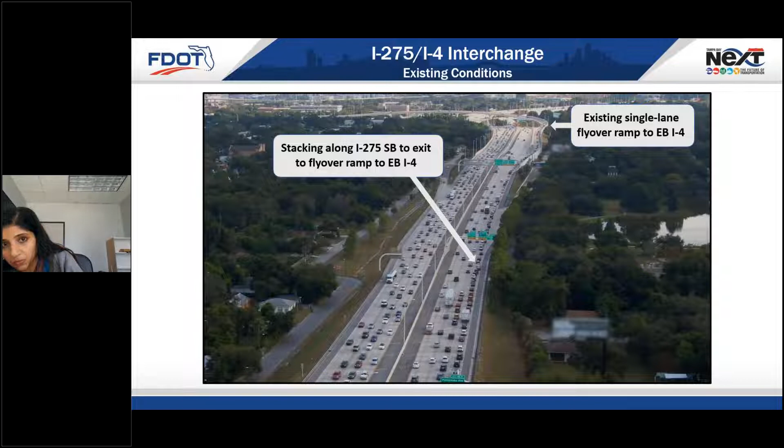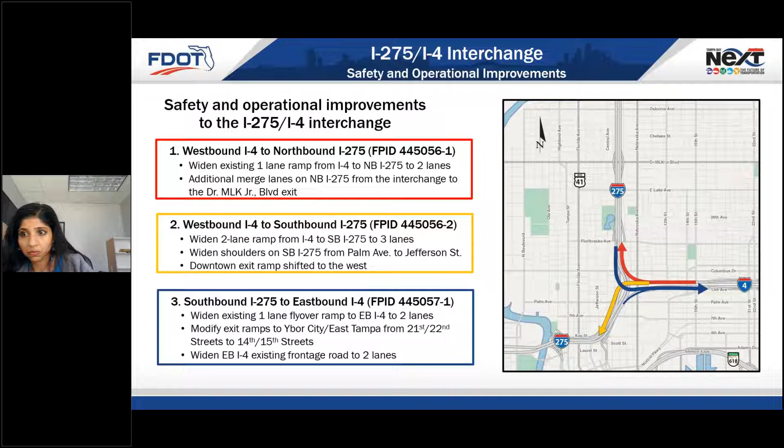These quick fix safety and operations adjustments will reduce the previously stated lane weaving and speeding, the congestion and lining up at the I-4 exit, and improve access to the local exits.

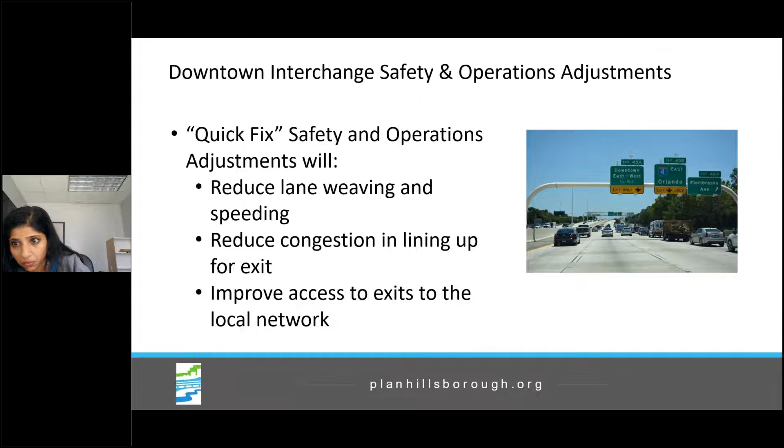FDOT is measuring that the downtown interchange will reduce deaths and serious injuries on I-275 near I-4 by nearly half. This means that the downtown interchange can prevent 1 to 2 fatal crashes and roughly 220 injury crashes annually. Since there are roughly 200 fatal crashes in Hillsborough County annually, this can mean a 1% drop in that measure. FDOT is also measuring a 14% traffic reduction on local streets.

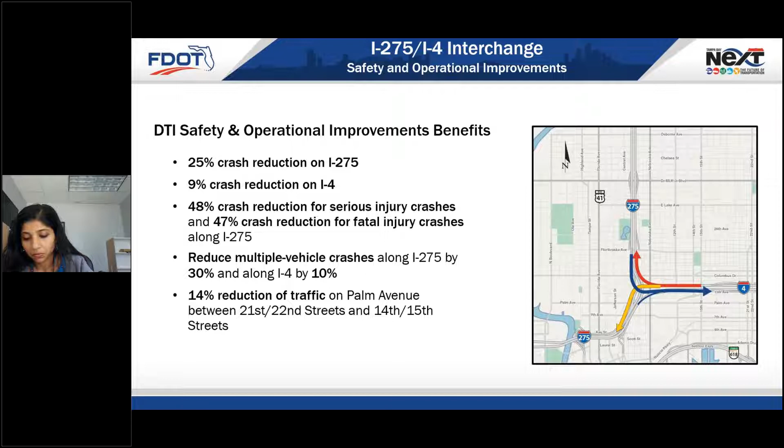So continuing on that topic of local streets, the downtown interchange is also planned to improve connectivity and safety on the local street network below. There is a proposed trail system that will connect the Tampa Heights Greenway project to Ybor and Encore development.

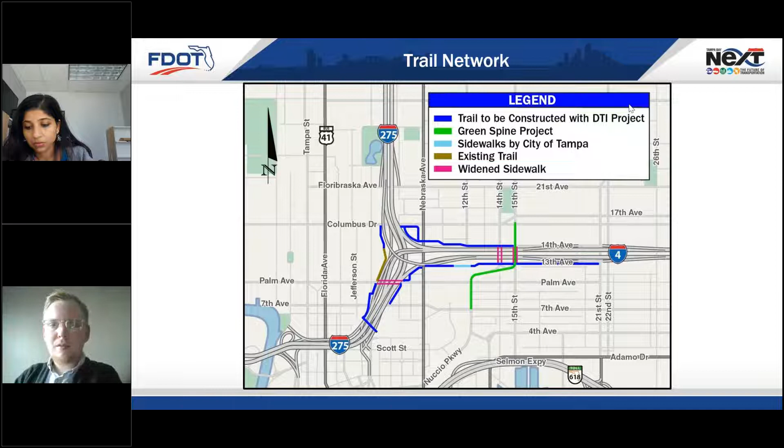Oh, did my screen change? Can you still see me and see the screen? Okay, I see your screen.

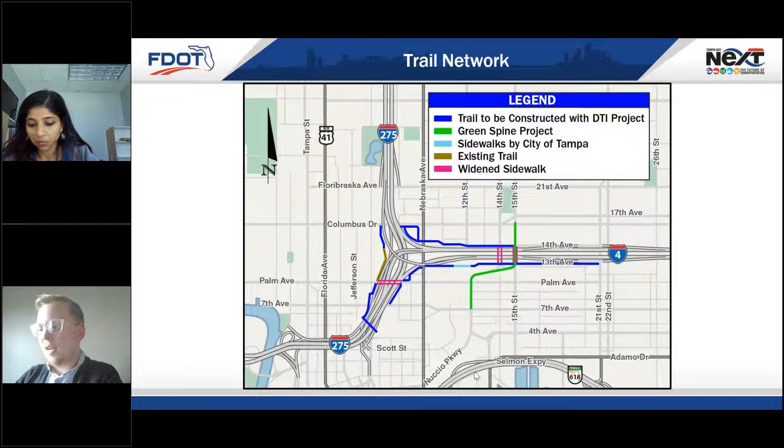Full screen. Okay, perfect. There's a proposed trail system that will connect the Tampa Heights Greenway to the Ybor and Encore development. Further, these improvements will complete streets under the interstate to connect these communities. The TIP amendments are also intended to relieve some issues on the local street network below, like drivers driving too fast on and off the interstate ramps and difficulty in seeing at night. Some mitigation strategies include reduced lane widths and having a high emphasis on crosswalk markings.

This slide shows the typical street sections for 14th and 15th Streets. While FDOT is responsible for the work on 14th Street, the City of Tampa has plans to improve 15th Street through the Green Spine project. These changes include sidewalks moving from 5 to 6 feet and lanes being narrowed.

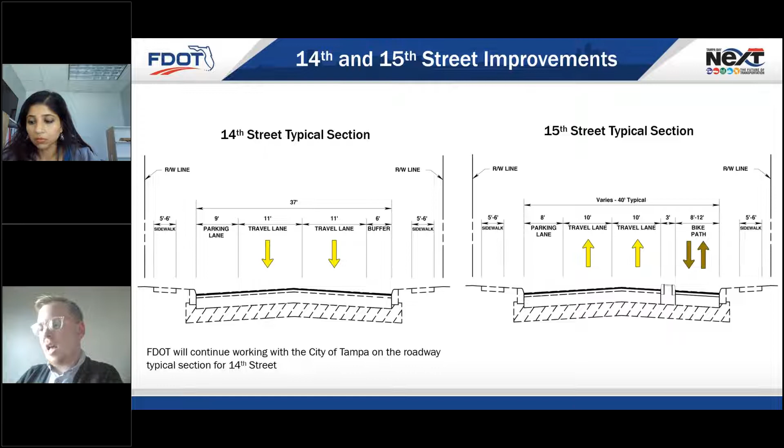The first amendment in this set is amended from right-of-way acquisition to right-of-way and utilities, preliminary engineering, environmental care, and design build for a total of $26 million. This section is westbound I-4 to northbound I-275. The next amendment is an addition of $60 million for westbound I-4 to southbound I-275. And the third amendment is the downtown interchange project adding $66 million for the I-275 southbound off-ramp to I-4. These 3 amendments make up roughly $154 million.

So the next group of amendments is the Westshore interchange reconstruction preliminary phase. These 5 projects are preliminary projects that make up 1 out of 4 phases of the Westshore interchange. The interchange has been a top regional priority for many years, and the changes are intended to reduce congestion and weaving at the intersection of State Road 60 and I-275. They will also complement the Howard Frankland Bridge reconstruction.

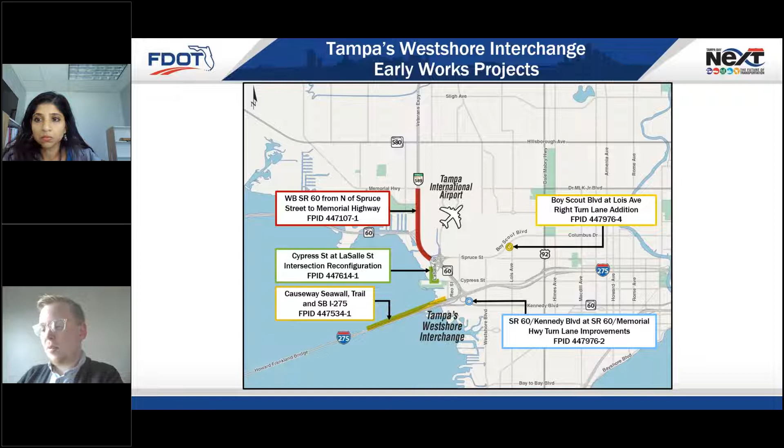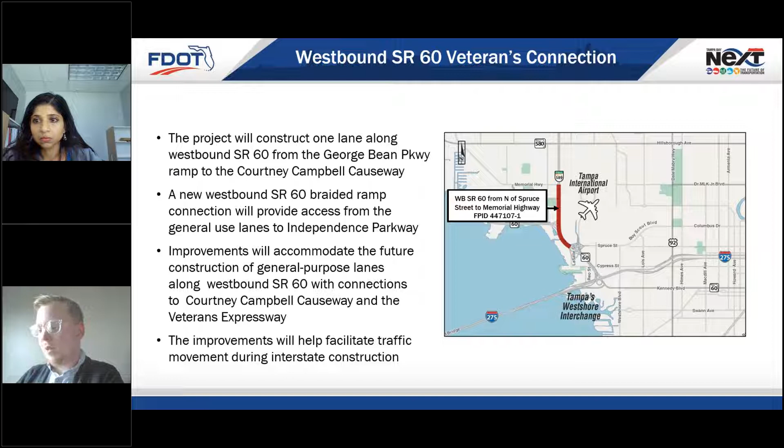The first project, westbound State Road 60, will construct 1 general purpose, not a toll lane, along westbound State Road 60 from the George Bean Parkway to Courtney Campbell Causeway. This project has a total of around $36 million for utilities, preliminary engineering, environmental care, and the design build. The next project will extend a new seawall and construct an adjacent shared use path along the north side of the I-275 causeway. This project has a total of around $37 million.

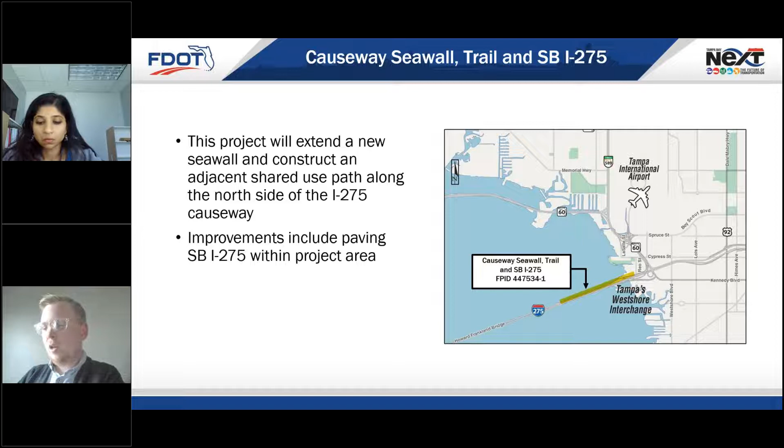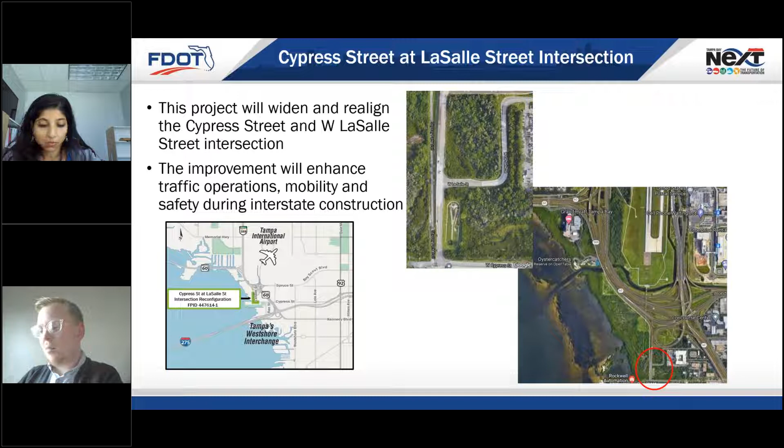The next project is Cypress at LaSalle Street. These two low-volume roads are near business parks. They'll be widened to enhance connectivity to two off-ramps and one on-ramp to the Westshore Interchange. The project cost is an estimated $3.6 million.

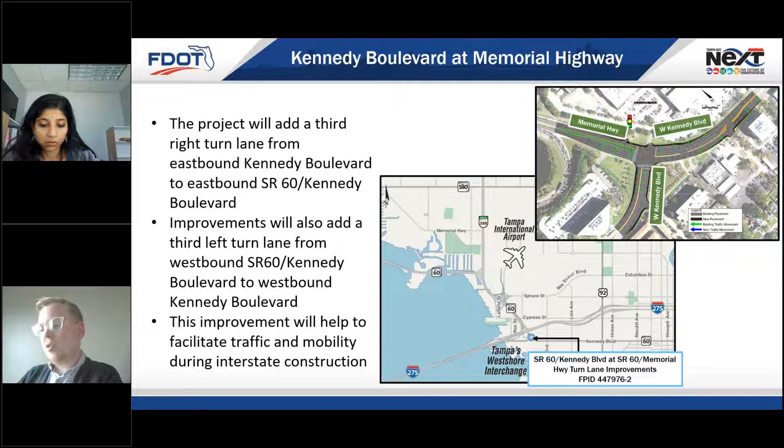Amendment 13 is West Kennedy Boulevard at Memorial Highway. It will allow the construction of additional left and right turn lanes, one from eastbound Kennedy to eastbound Kennedy, the other from westbound Kennedy to westbound Kennedy. FDOT believes these will also facilitate traffic and mobility during future interstate construction, and the project has a total of nearly $2 million.

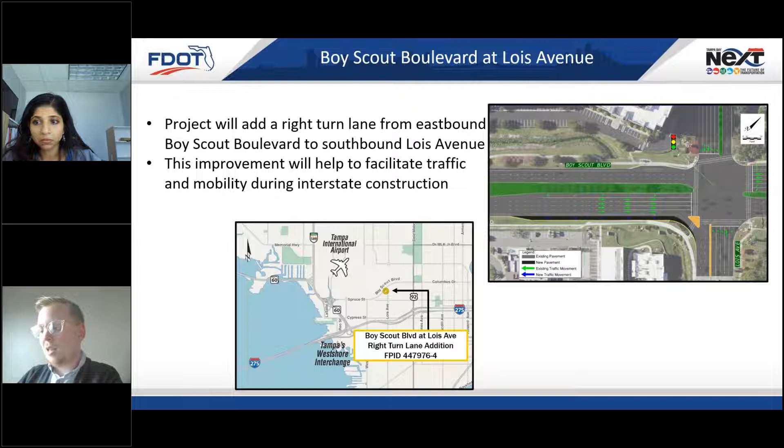The final Westshore Interchange amendment is a project to add a right turn lane from eastbound Boy Scout Boulevard to southbound Lois Avenue. This project has a cost of around $527,000.

Finally, the Integrated Corridor Management, or the traffic congestion management technology, will allow a traffic control management center to manage congestion among several key corridors. These corridors include Nebraska Avenue, Tampa Street or Florida Avenue, Hillsborough Avenue, Dr. MLK Jr. Boulevard, Boy Scout Boulevard, and Kennedy Boulevard.

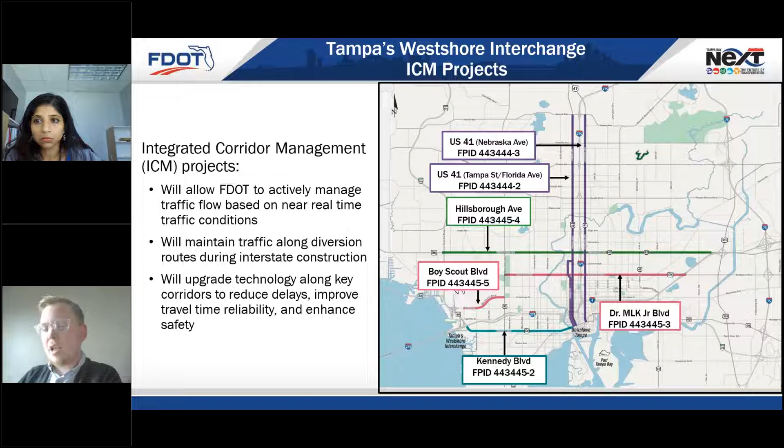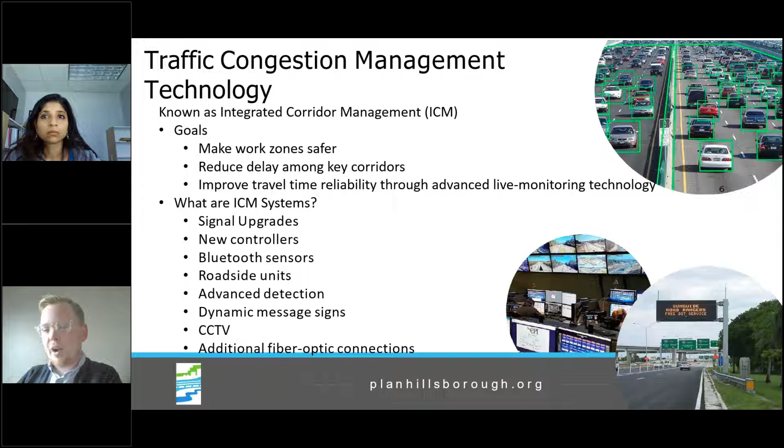These systems include advanced detection monitoring systems, dynamic message signs, and closed circuit television. They have the goal of making work zones safer and improving travel time reliability. Ultimately, they will deploy technology to allow engineers to see what's happening with traffic in real time. And as stated before, Ed Albritton from FDOT will elaborate on these technologies. So the first of these amendments is roughly $5 million for the design and build on Florida Avenue or Tampa Street. The next is roughly $6 million for Nebraska Avenue from Kennedy Boulevard to Bearss Avenue.

Amendment number 17 is $4 million for the design build of ITS systems on Kennedy Boulevard from West Memorial Highway to Ashley Drive. The fourth is Amendment 18 for funding, including $3.8 million of ITS systems on Dr. MLK.

The fifth is for $3.3 million for ITS systems on Hillsborough Avenue. And finally, the sixth ICM project, and amendment number 20, is $1.6 million for ITS systems on Boy Scout Boulevard from Airport Service Road to Dale Mabry Highway.

As part of our public participation pilot, we're aiming to ensure that the public has had the opportunity to voice their concerns and support before they come before the committees and board. One of our outreach projects came from the Long Range Transportation Plan and Outreach Survey that received over 5,200 responses. In this survey, respondents were given 4 options regarding a downtown interchange reconstruction.

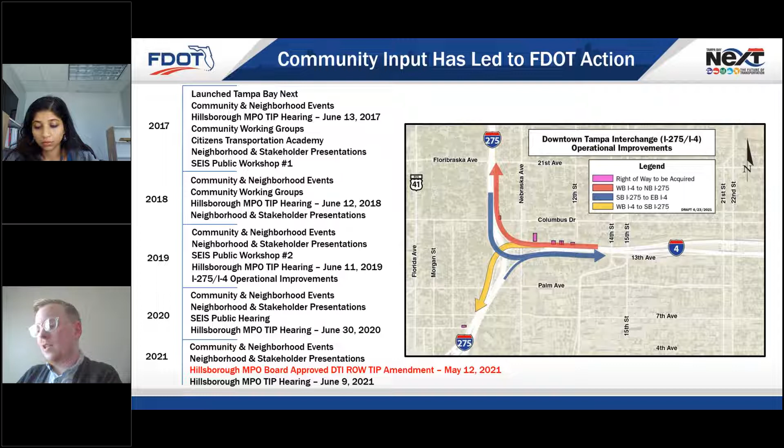While the no-build score was higher in downtown areas and the full rebuild rating was higher in ex-urban areas, the safety and traffic quick fix option had the highest star rating overall and was supported or unopposed by most zip codes. As part of the pilot, we also asked jurisdictions what public outreach they've done. FDOT in this case has done significant outreach regarding the downtown interchange since 2017. This has involved a series of community and neighborhood events, community working groups, and neighborhood and stakeholder presentations.

As part of the pilot outreach, the TPO has also done significant outreach for these projects. This has included a press release to 30 media outlets and over 100 neighborhood associations and community groups. There's also a web page that has been posted. Further, there's been social media outreach that can be seen on the left, and 6 of these signs on the right posted along project corridors.

So the TAC and CAC had some suggestions for us. These include leading pedestrian intervals at intersections with additional turn lanes, accommodating cyclists to Cypress Point Park and Courtney Campbell Causeway, noise walls at Robles Park, landscaping at noise walls, narrow lanes and wider sidewalks on 14th Street in coordination with the City of Tampa, traffic signal prioritization for buses on ICM corridors, to ensure that new fences do not impede the walk and bike access opportunities, and to refer to the downtown interchange as part of the high injury network rather than a Vision Zero corridor.

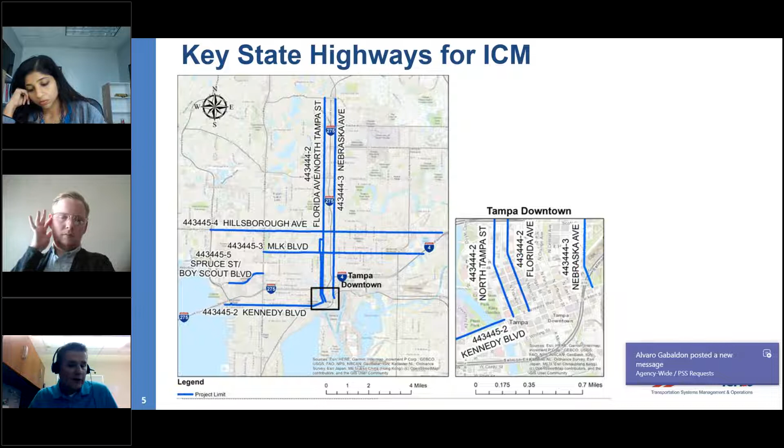We're filling in CCTV camera coverage holes if we have portions of these corridors that we can't see from our traffic management centers, and we want to fill in those gaps. Same thing with these Bluetooth readers, travel time measuring devices. We already have a fair amount of those deployed within the department, so we're just increasing that deployment as well. We're adding blank out signs as a part of this deployment, and right now that's a part of other efforts in the region.

We're doing that as a part of a project, I-4 FRAME, that I'm a part of, but those are more diversion route adherence signs, if you will. There's very little functionality to them. It's basically a right arrow that comes up, or it's not on. It's only active when the diversion route is active.

What we're exploring, if the budget will allow it, is trying to make these almost like small dynamic message signs with a little more functionality. I don't believe they would function 24/7 like a normal interstate dynamic message sign, or even arterial dynamic message sign, but I would like to be able to get a little more functionality at these strategically important intersections.

We also will be upgrading the detection at the important intersections, and upgrading controllers to allow us to get to what they call automated traffic signal performance measures. ATSPM is the mouthful of acronym that you'll hear referred to. Essentially what that means is we're going to deploy a system that will automatically collect and convert high resolution traffic controller data into actionable performance measures. It's going to allow us a look into coordination patterns at a depth that's just not possible with legacy systems. That's about the simplest way I could put that.

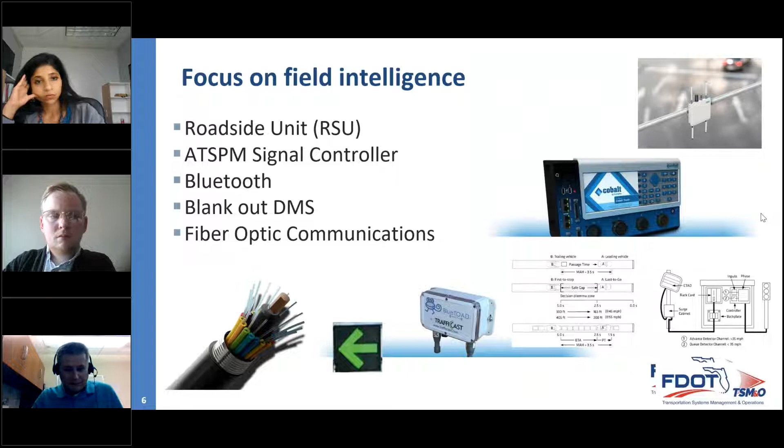The system we want leverages these signals and these facilities to facilitate that trip. It doesn't just tell you which way happens to be the fastest at that moment. It tries to get involved in that trip and optimize it. Next slide.

Some of the other projects, as I mentioned, we're kind of filling in gaps. These are the two big ones that are the biggest connected vehicle deployments for sure, but they're not vastly different from what we're trying with the ICM as well. So I-4 FRAME is already moving along, has been for quite some time now. We're moving up on the final plans for the District 7 portion, and the City of Tampa ATMS has been going for even longer than that. Next slide.

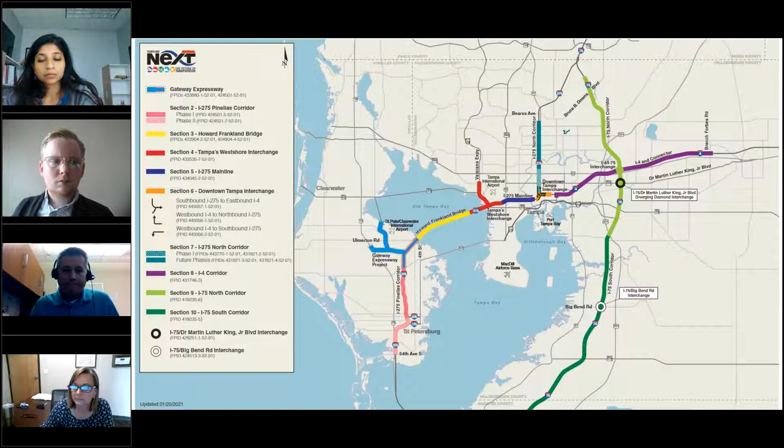Sure, Jeff, go ahead. Yeah, this is for Ed, and I'm just curious on the map. Maybe you can bring it up. The map where you showed the potential alternate routes from the airport to downtown. Is that like hypotheticals, or I'm just curious as to why on certain days of the week different routes would be recommended? That's totally hypothetical. And to point out, not this one, Connor, it's the last map which shows the alternate routes. I just saw it. Anyway, go ahead, Ed. Yeah, this one.

Well, oftentimes, that's not necessarily just a recurring traffic decision. That's often incident driven. And I didn't really create the slide, so I'm kind of trying to read the tea leaves a little bit, but I think that's what they're trying to highlight, that given what's going on any given day, any given community, you might need to deviate from what is typical for you, if travel time is what's most important to you.

Okay, that's what I figured. It was just the days of the week were throwing me off. They were listed there like it was an expectation or something. Okay, thanks. Yes, sir. I had a similar question too, so thanks for clarifying that.

And also for the City of Tampa ATMS project, I had a question. Is FDOT paying for that for the ICM projects? Did we pay for the City of Tampa? Was that what you asked? Uh-huh. I know at least a good portion of the funding was FDOT money. I don't know if it was all. Once again, my day-to-day activities are predominantly on the interstate, so I don't attend those progress meetings for the ATMS. So I'm not, unfortunately, completely plugged into it.

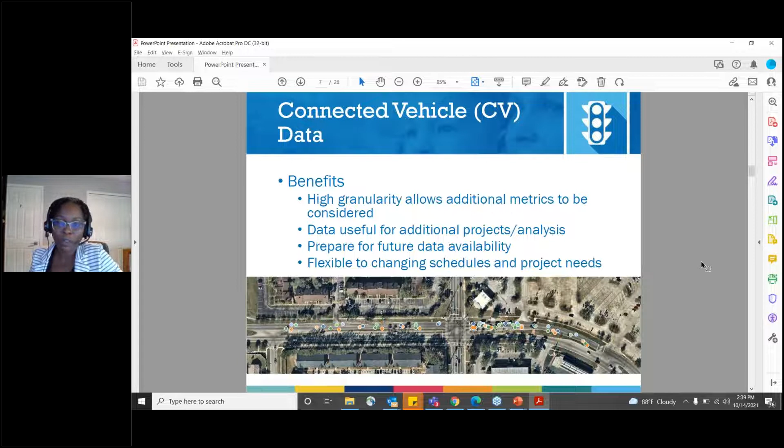So as this diagram shows, there's a really high level of granularity with this data, and you can really see what each vehicle is doing as it travels through the corridor. This has allowed us to look at some additional metrics, which I'll talk about shortly. We also think this data may be useful for some other projects beyond signal retiming evaluation. We're looking at some of those use cases now, and we're also hopeful that starting to work with this data now will help us prepare well for when connected vehicle data becomes more common.

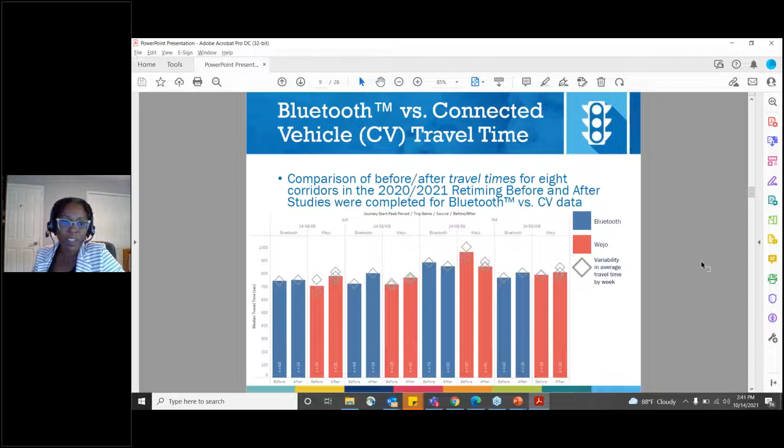From a high level perspective, we found that the travel times calculated by the Bluetooth data versus the Wejo data were within about 30 seconds of each other. And we also found that if the Bluetooth data was showing a reduction in travel times for the corridor, the Wejo data typically also showed a reduction in travel times for the corridor. So we're feeling pretty good about the usability of this Wejo data.

Next slide, please. Next slide, please. Thank you.

So now I'm just going to go through the additional performance measures that we've been able to calculate using this new data source. As I noted earlier, historically, we focus on evaluating the 3 metrics along that top row on the slide: the end-to-end travel time, the segment travel time, and the delay at intersections. And we're still able to calculate all of those metrics using the Wejo data, but due to the increased granularity, we're also able to look at some additional metrics like signal progression, the number of stops and slowdowns, and the travel speed along the corridor.

Each of those metrics has some limitations, but as we look at each of the metrics together, we're able to get a pretty good picture regarding the benefits of a signal retiming project along a corridor. And each of these metrics might also be applicable to different projects depending on what the goal of the retiming is for a particular corridor.

Thank you for going to the next slide.

So the first metric we're going to look at is the number of stops and slowdowns along a corridor. And this particular image shows one individual trip. Along the y-axis, it shows how fast a vehicle is moving, and along the x-axis, it shows how far along in the journey it is from a time perspective. So you can see that this vehicle starts out going about 45 miles an hour. It increases speed a little bit, and then you can see where it dips down to about 15 miles an hour there at about 50 seconds.

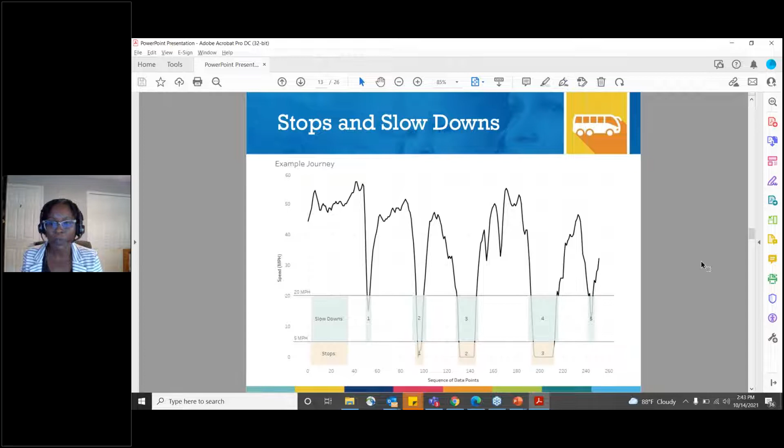And within Wejo, anytime the vehicle slows down under about 20 miles an hour, it's counted as a slowdown. And anytime it slows down under 5 miles an hour, it counts as a stop. So we're able to do this type of analysis for every vehicle along a corridor. And then once that is calculated for each vehicle, we're able to look at some average statistics like how many times along a corridor a vehicle is likely to slow down or stop before and after the retiming.

Next slide. So this data can be really helpful in terms of a before and after comparison because it allows us to see how often, on average, vehicles are likely to hit a green light along a corridor.

Next slide, please. So if you click on the slide, it should have, or is this just a PDF? Okay, this is just a PDF, I think.

Is a link here? Should I? There's a link here. If it'll allow you to hit the, not the link, it should play though if it's in the presentation. But it's okay. It's a PDF, so I don't think it can present itself now.

The data is helpful because it allows us to see approximately what the queue is doing at a specific intersection. And I say approximately because, again, we're only looking at about a 3% sample size of all the trips. And so there may be a tendency to underestimate the queue length. But we're still overall able to get a better idea of how the queue is developing. We just may not be able to make specific queue length calculations from a before and after perspective. Next slide, please. You can move on, yeah, thank you.

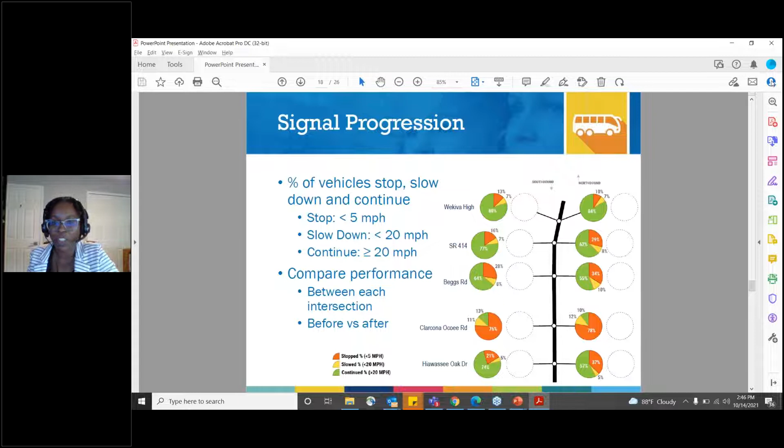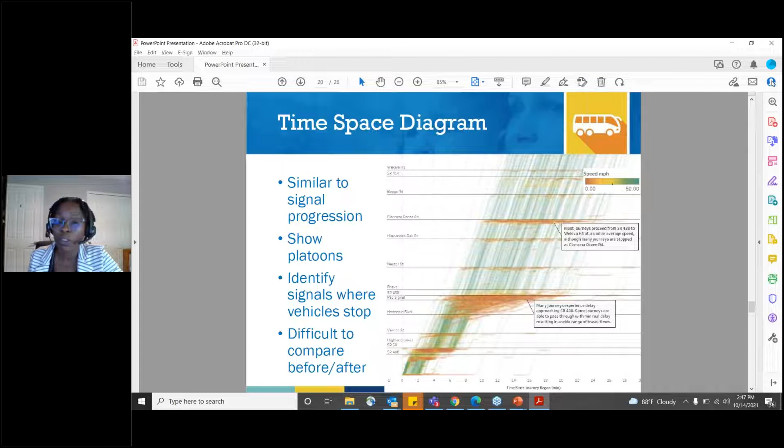And then similar to the previous metric, we can also look at the progression of individual vehicles and create the time-space diagram that is shown here. This diagram has time on the x-axis, and on the y-axis, it shows each of the intersections that the vehicles are proceeding through. You can see in this example that there's a lot of red and horizontal movement at that State Road 436 intersection in the middle of the graphic. So the travel time is getting pretty spread out at that intersection. This type of information can be particularly helpful for our maintaining agencies and for the retiming consultants prior to the retiming analysis to help them with defining the goals for the retiming for a particular corridor.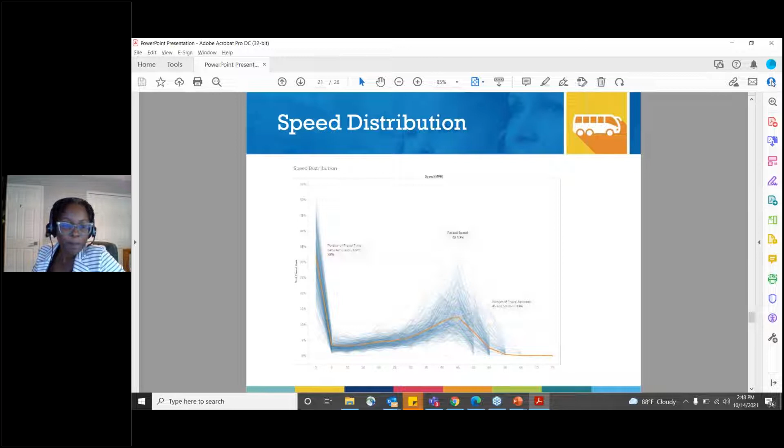And from that speed management perspective, we would want to see that orange line move over to the left a bit in the after condition so that a greater percentage of vehicles are moving at or below the posted speed. Next slide, please. And then next slide. And then the last metric I'm going to talk about is corridor utilization, where we can basically look at the distance that particular trips are moving along a corridor.

And this type of information can be helpful in understanding how signals might be coordinated together, and if there's a particular type of trip that's predominant along a corridor that we want to correct for. This information can also be helpful for our maintaining agencies and retiming consultants to have prior to retiming for developing a new retiming scheme.

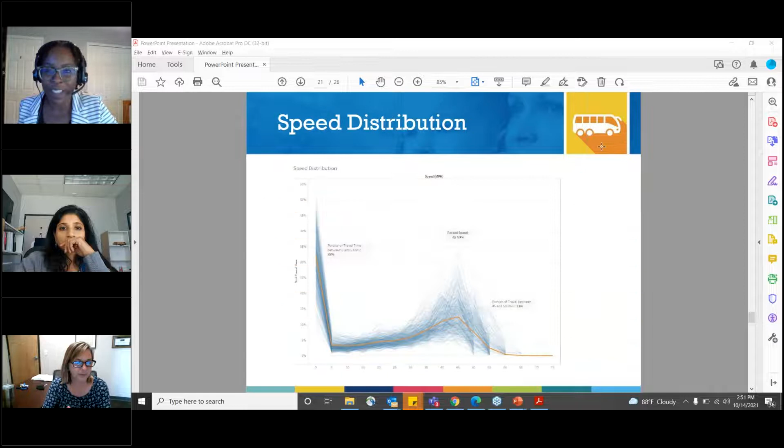I've talked to consultants who do signal timing in our region about programmed stops, how do you control it, and also to use shorter cycle lengths. So I'm trying to figure out where my question is really going. What kind of cycle lengths were they using? Do you have that? It's different for every corridor. For the one in the example, I don't know off the top of my head, but I can find out for you. But it really just depends on the jurisdiction, honestly, what cycle lengths they want to use.

Yeah. Well, it's good to have additional data, and I applaud you for looking at travel time reliability and not just travel time, because travel time, of course, you get rid of all your delay, but it also allows people to speed. Right, exactly. I'm sorry, I had an emergency off to the side for a little bit. Did you have safety information in here too? But this is really just focused on using a different data source and how we can use the WEJO data to evaluate and look at the corridors from a different perspective, right? Yeah, that's really the focus here.

Yeah, having this new data set, we've always been looking at travel time reduction, travel time reliability, and intersection delay. But the granularity of this data has allowed us to look at some different metrics that we're excited about, and try to get some of our maintaining agencies excited about too. Yeah, because there's so much data available within every vehicle. Someone was just saying the other day that we launched the first space shuttle with less technology than what we have in our car today. It's pretty amazing. Thank you for bringing this to us.

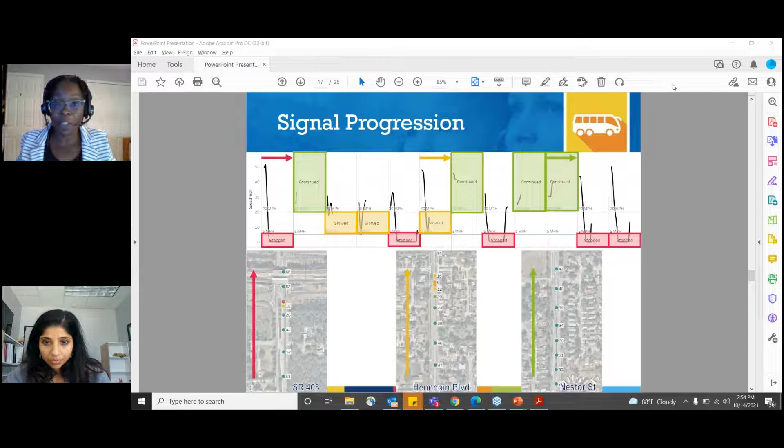And we're sort of working through what we'll do for future years. So if you need, on particular corridors, if you're looking for one type of data, that's all you need, you need to purchase that according to your need and on a corridor basis. Well, we purchased the data for the entire 3-county region for a month at a time, and once we have that data, we can really summarize it.

However, if, let's say, you were within the region and you knew you wanted some specific type of data for a corridor, we could pull that down and then share that with you. We just can't share raw data. Yeah. Gotcha. Okay. So you're able to share the reports for other jurisdictions according to their requirements. Exactly. Gotcha.

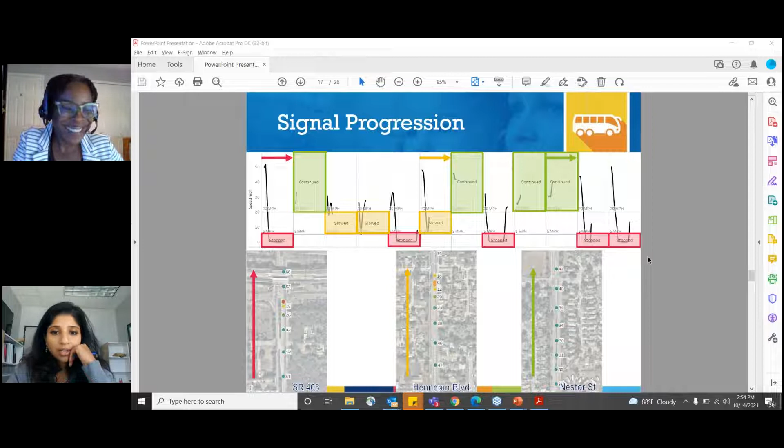Yeah, I'm still digesting it and seeing what other uses we might have with this. It's a lot, and feel free to follow up after, because it is a lot. I know that I just blurted it out. I might need some clarity on the queuing analysis, what you said was and was not helpful.

Well, for the queuing, what we're finding to be helpful for us right now is more just getting almost a qualitative feel for where the queue is ending. Because, like I mentioned previously, we used to set out the Bluetooth devices where we thought the queues would end, and we were finding that cars were queuing far, far beyond where we had our devices.

And so since we were able to see the data with this type of granularity, we can see how far back the queue goes. And Kittelson's working now on working through the data to get better specificity, but as of right now, as of reporting time, we're not using the data to calculate specific queue lengths, like 95th percentile. So this is vehicles moving from north to south, correct?

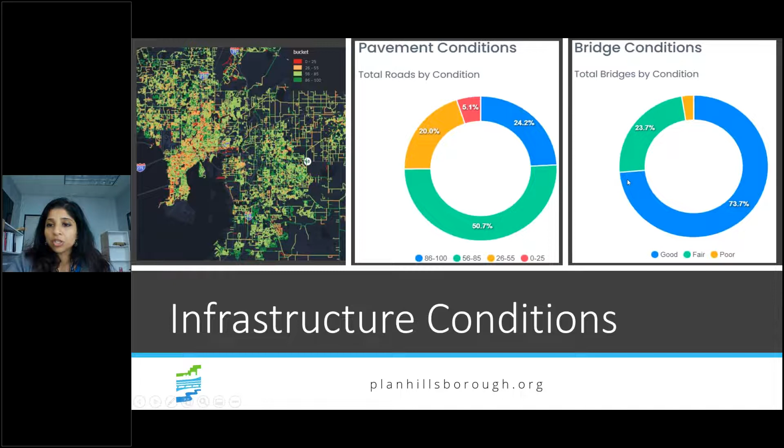We are trying to explore other data sources and see if we can directly track the emissions coming out based on the monitors which are installed in various places across the region. So if we are able to get the data from the monitors, we'll be trying to incorporate that into this tool.

And like I said, this is just a status update. We are in the process of finalizing the document. And once it's done, it will be hosted on a website and other jurisdictions and agencies will have access to it. They can pull the reports, and if there is anything that they would like to see, we can produce reports in addition to it.

I can also quickly show you. Sorry. I was thinking I can pull up the website and show you the tool. But the information is listed here. I will have a more updated website for the tool. And when I get that, I can share it with you all if you have any other interest, and I can go over it once again. And also, if any partner agencies need any additional information, I can get that for you.